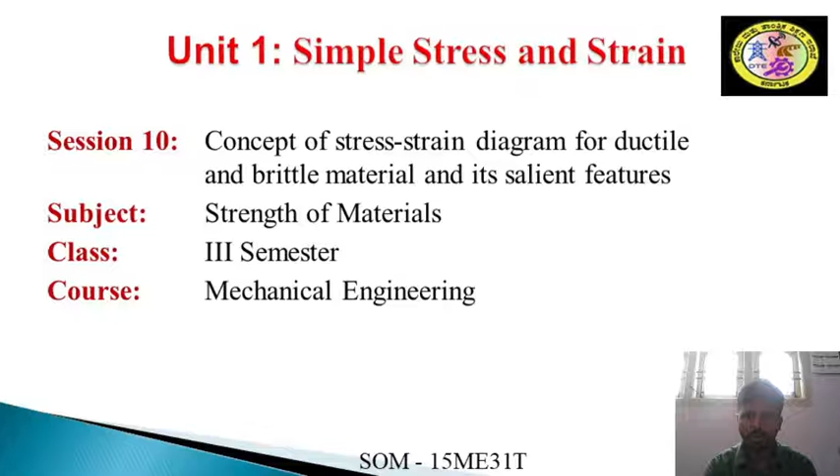ದೆನ್ ಫಸ್ಟ್ ಕ್ವಶನ್ ಕಮ್ಸ್ ಇನ್ ಅವರ್ ಮೈಂಡ್ ಈಸ್ ವೈ ವಿ ನೀಡ್ ದಿಸ್ ಸ್ಟ್ರೆಸ್ ಸ್ಟ್ರೈನ್ ಡಯಾಗ್ರಾಮ್, or why we need to conduct this tensile test experiment.

First thing is we have got this stress strain diagram by conducting the experiment, tensile test experiment in universal testing machine for ductile material. Then why we have conducted ductile material, especially for the ductile material? The thing is in most of the engineering applications what we are extensively using this ductile material.

For example, it may be in terms of bridges, towers, antennas, like that. So in many structures we are extensively using this ductile material.

And one more thing is whatever materials we are using in our day-to-day application, before selecting the material, first we need to find out their properties. First we need to check the properties of the material. To know the property of the material, initially we need to test the material using universal testing machine.

First thing is the proportionality limit. Once again we will look into the figure. The 0 to A is almost a straight line, and we have shown a slope here. Slope of a line is E, that is nothing but your Young's modulus. If you want to calculate the Young's modulus, you need to calculate it in this proportionality limit. The slope will give you the Young's modulus.

The first thing is proportionality limit. The 0 to A is a straight line, which is the proportionality limit. In this proportionality limit, the value of stress is directly proportional to strain, and Hooke's law holds good up to only point A. Hooke's law, which says stress is directly proportional to strain, holds only up to point A.

The next comes is the elastic limit. The region A to B is the elastic limit, or we can say it as 0 to A. The 0 to B is the elastic limit.

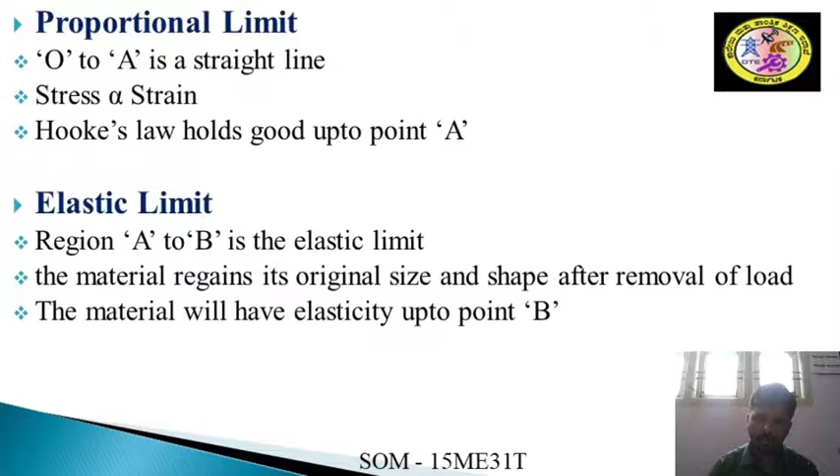Beyond point B, the plastic deformation starts. Till point B, the material will behave elastically.

Then next comes the lower yield point, point D. After point C, once again if we look into the diagram, the point D is a little bit lower than point C.

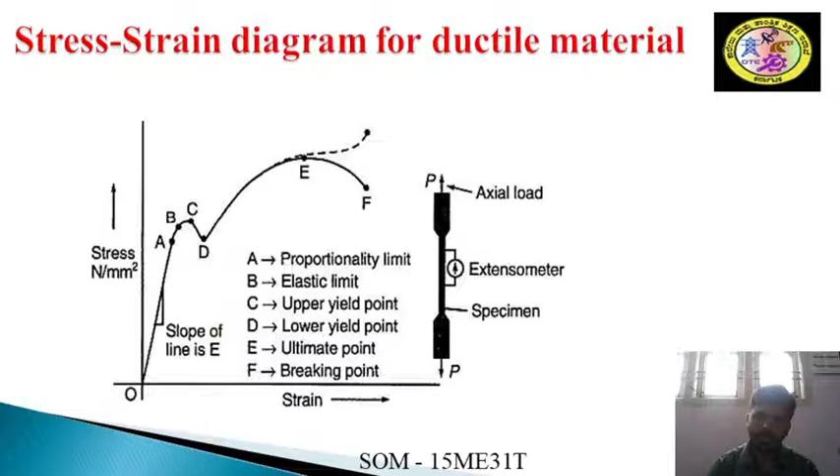Breaking point F is called the breaking point because beyond point E, necking occurs. Necking means the cross section area of the specimen keeps reducing almost until it's about to break, so it becomes very thin. This process we call necking.

The strain increases with decrease in stress. Even if we don't increase the load much, the strain value keeps increasing. Why it happens is the diameter of the specimen has already reduced, so it won't take much load. Even for smaller load, the strain will keep on increasing.

The stress at this point is called breaking stress. The corresponding stress at point F we call breaking stress. Similarly, the corresponding stress at point E we call maximum or ultimate stress.

For calculation purposes we used to consider only the ultimate stress, because after ultimate stress the material almost fails. We consider breaking stress only for the breaking point.

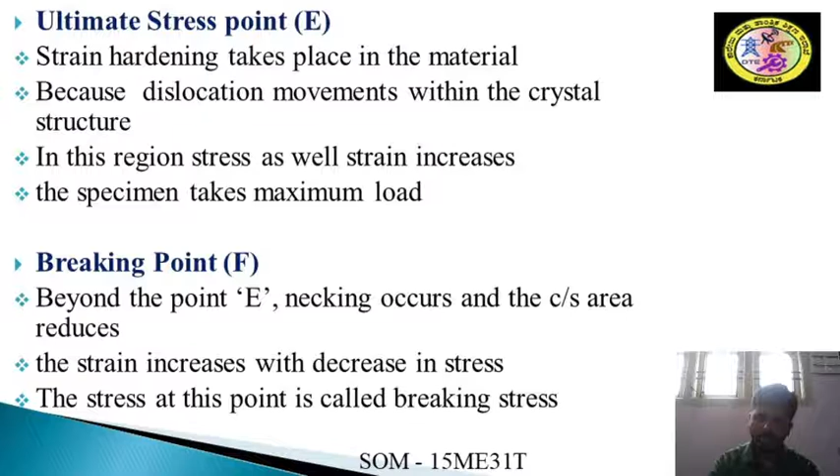Then there are few terms which we need to understand to solve certain problems on this concept. To solve problems on this stress-strain diagram, we need to calculate some stress values, and for that we need this concept and corresponding formula.

Then what is yield stress? It's the ratio of load at the yield point to the original cross sectional area of the specimen. Mathematically we may say Fy equals, F indicates the stress value: stress at yield point is nothing but load at yield point divided by original cross sectional area.

In the similar way, how do we designate ultimate stress? Ultimate stress is given by the ratio of ultimate or maximum load to the original cross sectional area. Once again it's the original cross sectional area, but the load will be the load at the ultimate point, called maximum load. Mathematically it can be expressed as Fu equals Pu divided by A0, where A0 means the original cross sectional area and Pu means the load at the ultimate point.

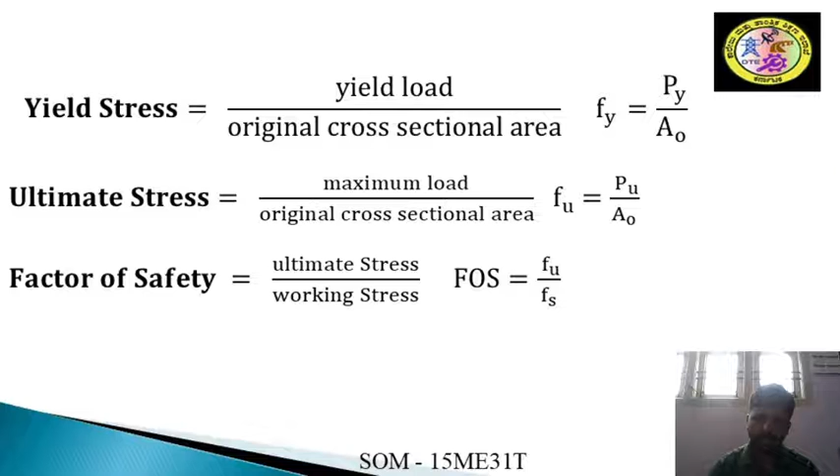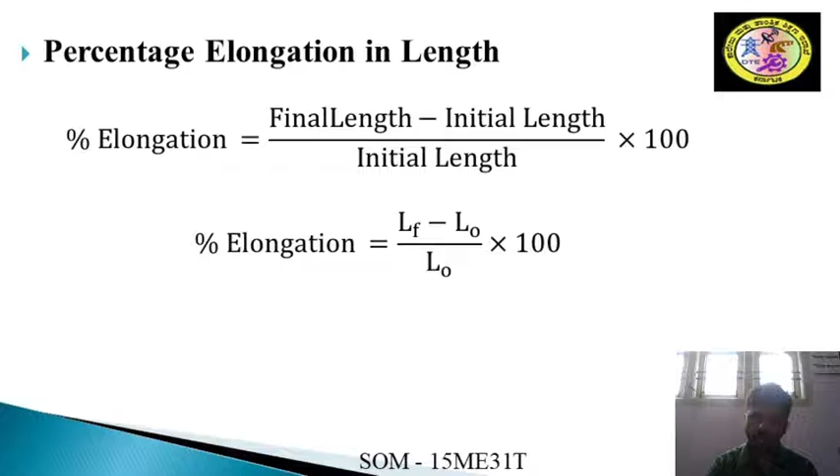Percentage elongation can be defined as the ratio of change in length to initial length. The change in length is the final length minus initial length, divided by initial length, into 100%. Mathematically it can also be written as: percentage of elongation equals LF minus L0 divided by L0 into 100%. This gives us the percentage of elongation that has occurred in the specimen.

Next one is percentage reduction in area.

As we know, whenever the specimen is subjected to tensile load, as the length increases, there will be a reduction in the cross-sectional area. How can we calculate the percentage of reduction in area? It is given by the formula: percentage reduction equals initial area minus final area, divided by final area. Symbolically, percentage reduction equals A0 minus AF divided by AF into 100%. By using these parameters, we can calculate the required things for our applications.

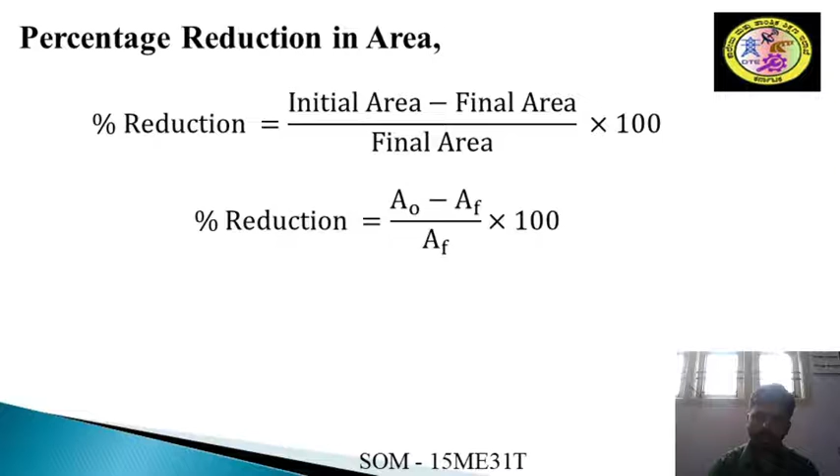One more stress strain diagram in this class is the stress strain diagram for brittle materials. As we know, mild steel is extensively used in most experiments because of its properties and elasticity. But how can we know the properties of brittle metals? This diagram shows the stress strain diagram for cast iron. Cast iron is a simple example of a brittle material, though there are other examples too.

The stress strain diagram looks like, if compared to our mild steel diagram, we are having a 0 to A straight line and A to B. That's all—fracture is occurring somewhere just immediately after the elasticity or proportionality limit, we can say.

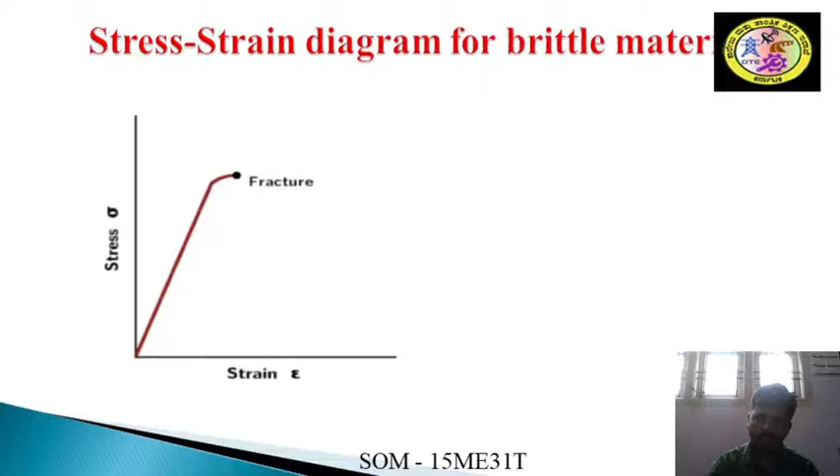When we see the salient features of this stress strain diagram for brittle material, like our ductile material, this brittle material will also have an approximate proportionality limit, not exact—it's almost an approximation. Beyond point A, the stress and strain both increase, like in our ductile material. Here also both the stress value as well as the strain increase after point A.

The material experiences smaller deformation before rupture, and there is no necking. The major difference compared to ductile material is that here there is not much deformation—only some small deformation before the rupture, meaning before the failure. Even so, there is no neck formation as we can observe in our ductile material.

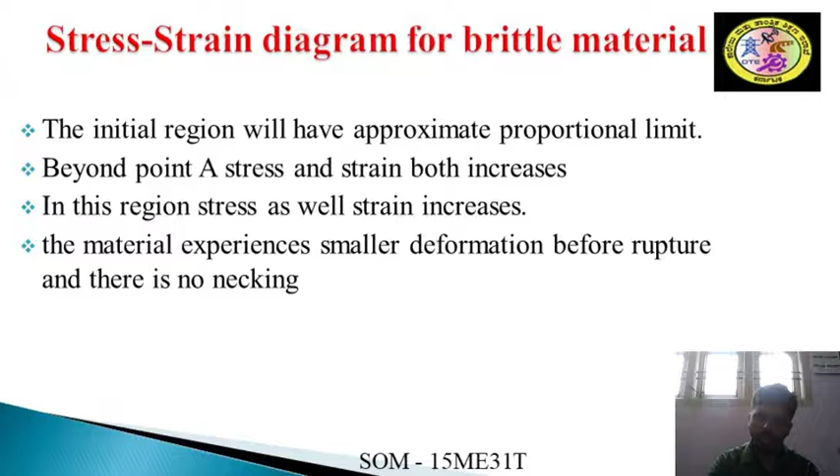Now we have arrived at the end of our session. Like in the previous sessions, here also we have a few MCQ questions.

We'll go through the first question. In a compression test, the fracture in a cast iron specimen would occur along the axis of load, and an oblique plane at right angles to the axis of the specimen would not occur. Think properly and select the appropriate answer.

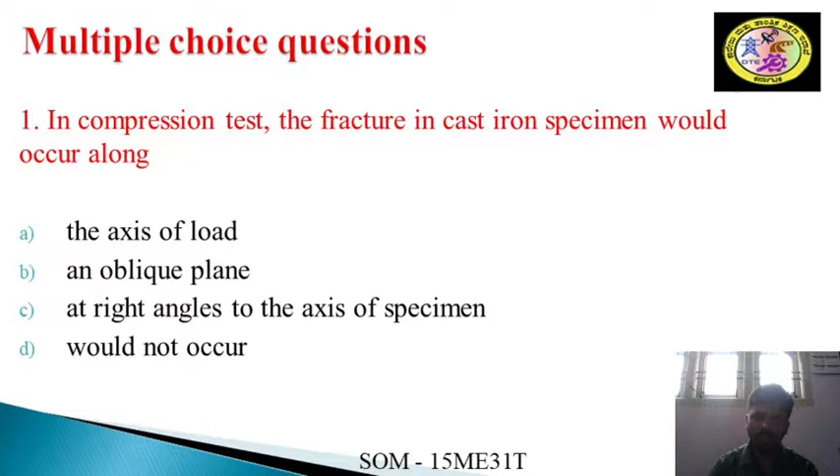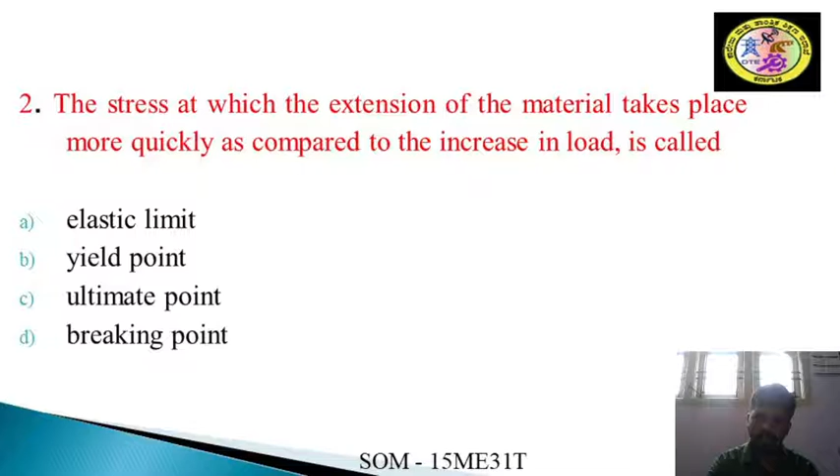The next question is: the stress at which the extension of material takes place more quickly as compared to the increase in load is called—either the elastic limit, yield point, ultimate point, or breaking point. Decide based on what you have understood.

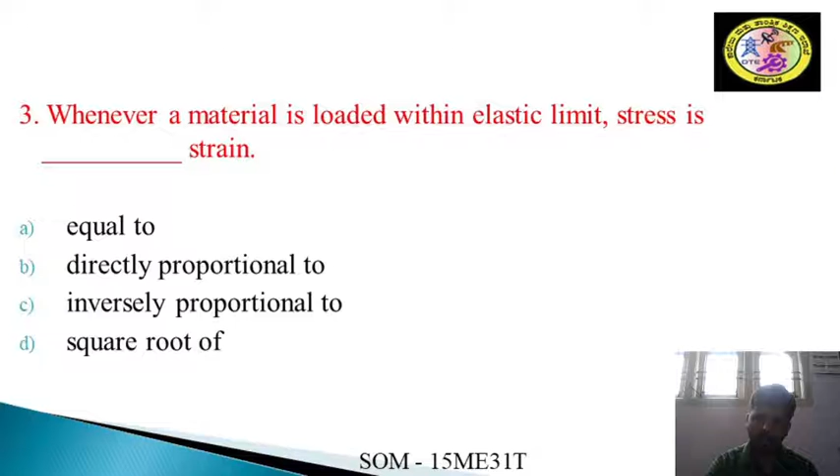The next question is: whenever a material is loaded within the elastic limit, stress is... strain. Whether stress is equal to strain, directly proportional to strain, inversely proportional to strain, or proportional to the square root of strain. Decide which one is correct.

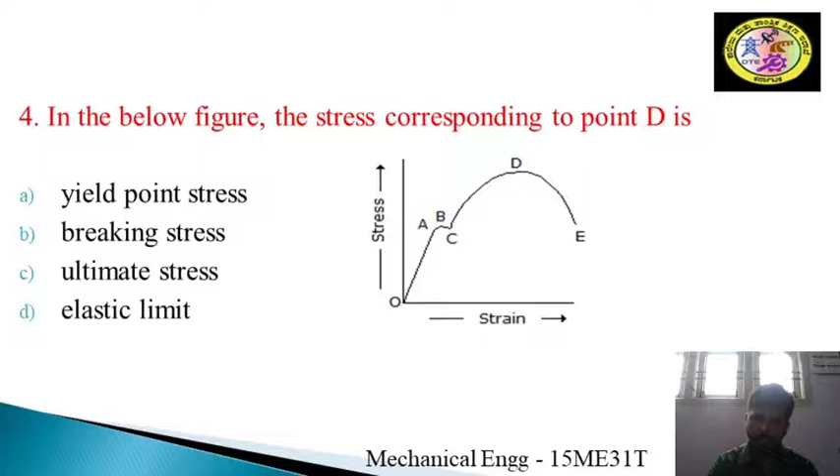The fifth question is: a material obeys Hooke's law up to—whether it is up to the plastic limit, elastic limit, yield point, or limit of proportionality.

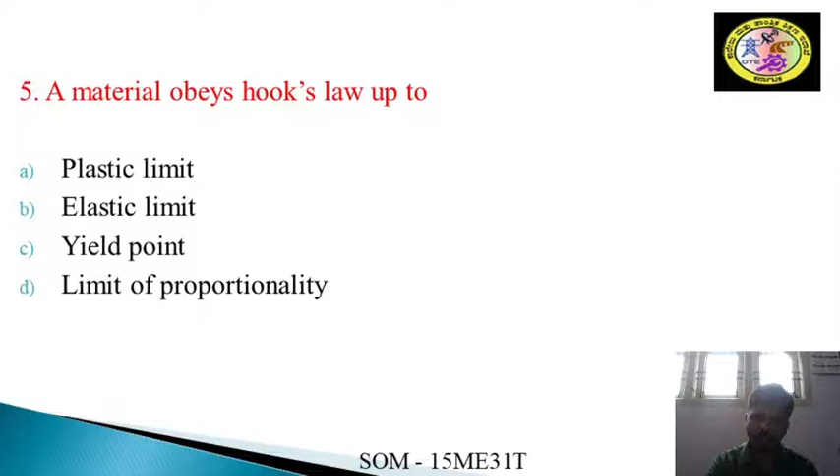Now we have arrived at the key answers. These are the key answers for the multiple choice questions which I gave earlier.

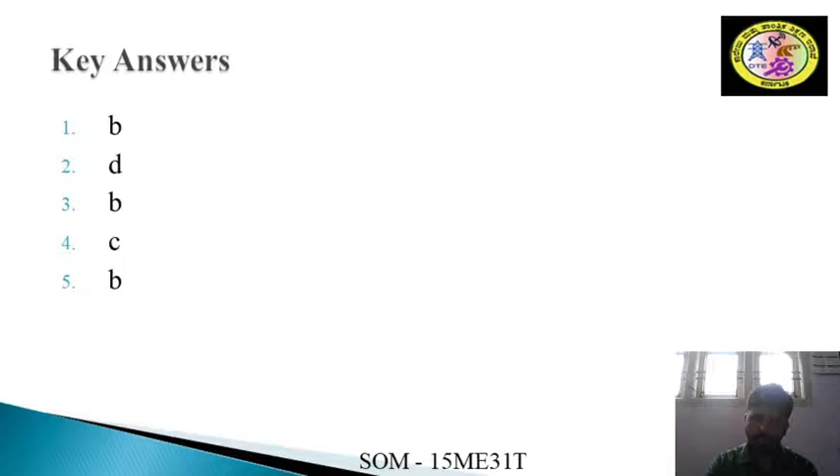Before concluding this session, I would like to recall what we have learnt. We have seen the stress strain diagram for brittle and ductile materials. We have understood why we need to conduct a tensile test on ductile material, how exactly we get the standard stress strain diagram for ductile material, and what different points we use to obtain it, along with a few parameters helpful for solving problems in coming sessions. We have also seen the stress strain diagram for brittle material, and how exactly it differs from that of ductile material.